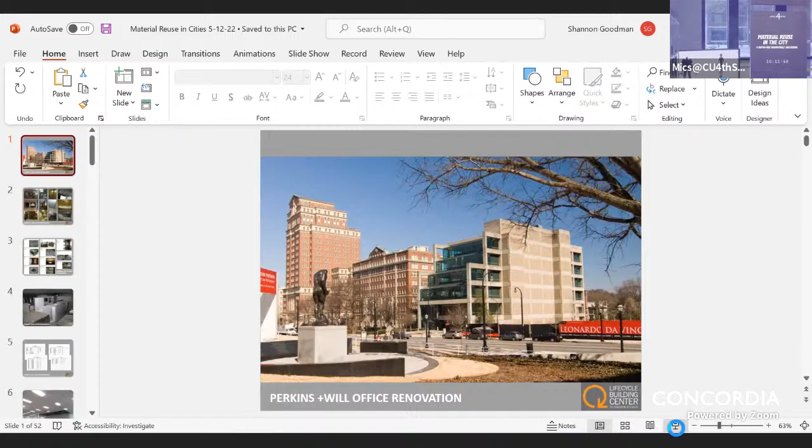Okay, so I wanted to just share a quick story. My background, or my path to reuse, started in architecture. And I wanted to just highlight my journey to where I am today, and then I'll talk a little bit more about what we're doing now.

So basically, this is a shot of where I used to work, a firm called Perkins & Will here in Atlanta. And this large concrete structure that you see was a building that was transformed by this company. I was involved in trying to figure out how we could reuse as many materials as possible in this building. It was a 50,000 square foot space.

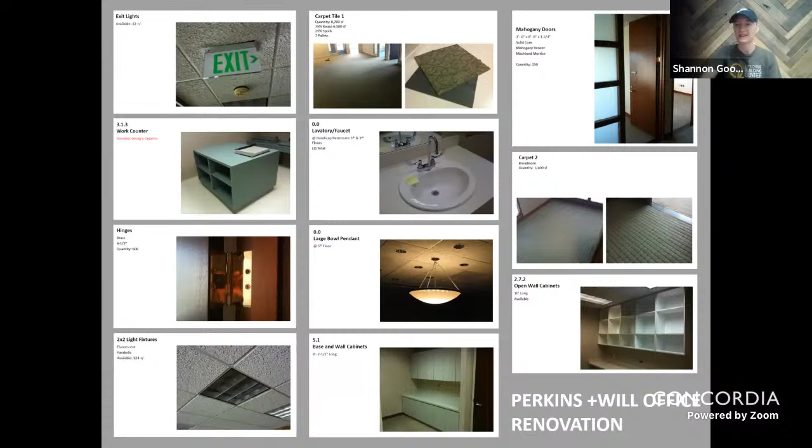And so lots of talking about data, Faisal, lots of tracking of information, and then just getting that information out to the community. So I would definitely like to talk with you more and learn more about what you're doing, because this is key. Being able to increase accessibility to this information is going to help scale up reuse. There's a physical aspect. This was actually before Lifecycle Building Center existed.

So we had an underground parking deck that we stored all the materials in while we were finding homes for them, and lots of data tracking on each of the organizations we donated to.

Just a couple of examples: we had schools, this is a church we gave ceiling tile to, and we had another nonprofit called Southface Institute, a great sustainability organization we were able to give cabinets and other materials to.

You can see some metrics we tracked in terms of the pounds of material and the value of those materials. Beautiful workstations came out of the space, carpet tile went to Habitat for Humanity, almost over $70,000 worth of carpet tile, and lots and lots of cabinets we were able to donate.

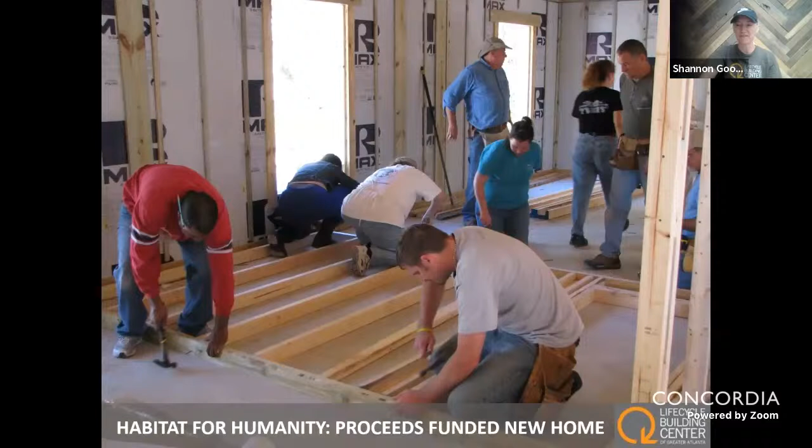But what's really awesome is what these nonprofits do with these materials, how it enables them to enact their mission and do more good work in the community. Habitat was able to have the proceeds from all these material sales through their ReStores fund the construction of a new home. This is a summary of some of the projects, all the different nonprofits that we donated to, and that's what led to my journey with LBC.

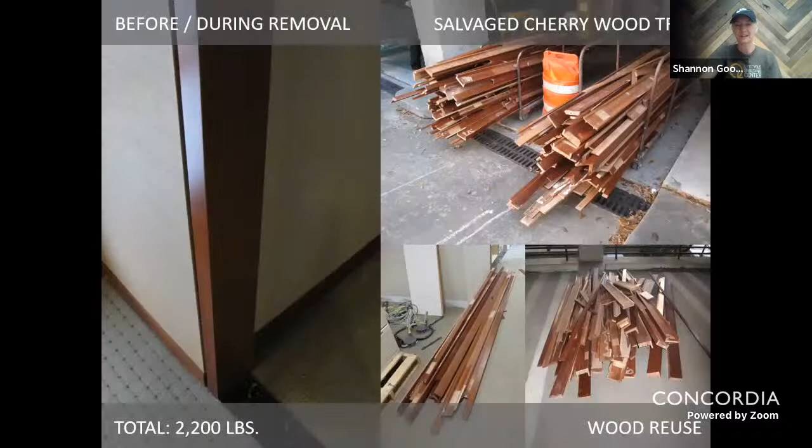I have this one final little story I've got to share though. We worked with our demolition contractor and salvaged this beautiful solid cherry wood trim, and the organization I worked with, Perkins & Will, transformed that into their conference room tables. So I never stop being inspired by what reuse can do in terms of community impact, but also how beautiful it can be. I'll share some stories, this is a little sneak peek for later in terms of our facility down here in Atlanta.

That's inspiring, Chanel—Shannon, rather. Sorry, we have a Chanel here. Chanelise. It's amazing what you can do from upcycling. I think a lot of people have a certain perception of it, and it's just incredible, the possibilities.

I'll hand it over to Isabel to tell us a bit about her work.

Sure. Hi, I'm very happy to join you guys from the other side of the pond. It's really exciting to see so many interesting things going down the same path that I'm working with. So I'm an industrial designer.

When I did my studies in Chile originally, I was a little bit like Faisal, very enthusiastic about sustainability. We actually tried to start a reuse market with secondary materials at the school where I was doing it, of course, with no budget and just enthusiasm. So it didn't get far, but that's kind of marked my way forward.

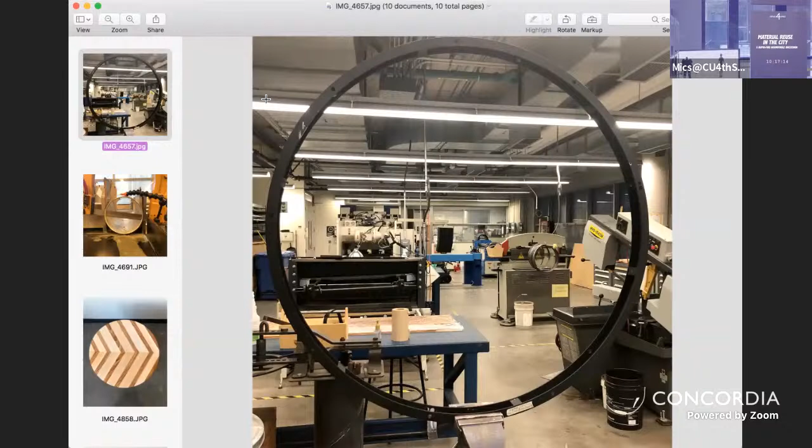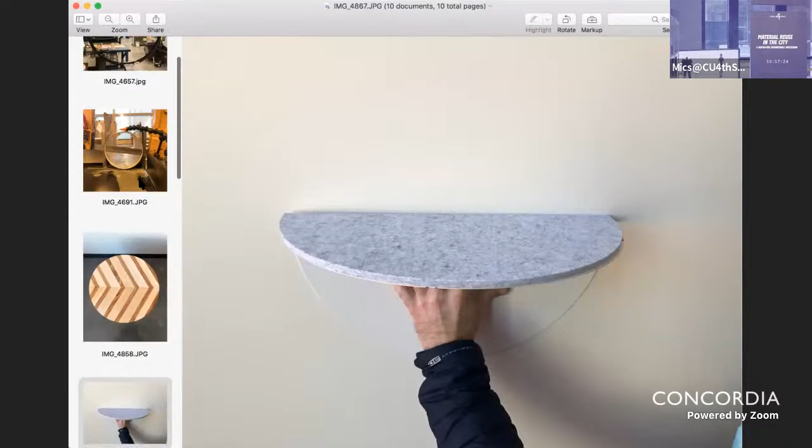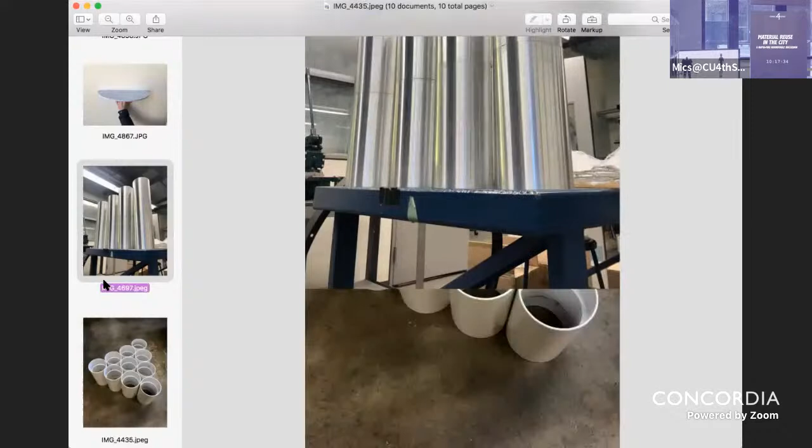So just a few images of some of my work in the workshops here, where I've been collaborating with a local manufacturer of lighting components and making some of these projects. These are the legs of a table project made from cylinders of a lighting fixture and plasma operations. So sometimes more on the craft end, and sometimes you can see there's more of an industrial side to it.

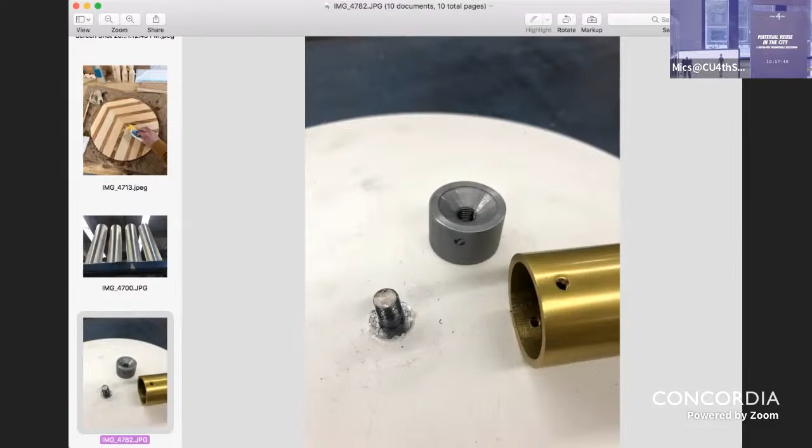For those that have had the chance, there's an exhibition—it's the last day, unfortunately, here at the 4th Space. So just to get an idea of what you can do again with upcycling and reuse.

So I wanted to jump into this topic and really ask our panelists what they see as the role of reuse in the circular economy, and the relative attention that it's been getting—reuse, repurposing, upcycling—these days.

It seems to me, I did a little search, and if you look globally, the term upcycling has been trending steadily upwards in terms of Google search terms since about 2008, 2009. That's very inspiring to see there's growing buzz, but I want to get your sense about this. I'm going to go back to you, Faisal.

Do you have a take on this? Yeah, I automatically think of reuse when I think of the circular economy. I don't know about other people, but obviously circular economy is a fairly comprehensive term that involves keeping flows as local as possible and minimizing environmental impacts. You can think in terms of energy, but I think of materials right away. I just think of the immense amount of energy that goes into materials.

I think there's more and more conversations happening about that whole hidden world, right? A lot of times when we talk about climate and energy-related emissions, we think of fuel for vehicles and buildings, but we're not always talking about the materials we consume and what a huge proportion research is showing it comprises in terms of greenhouse gas emissions. If we don't start figuring that out at the same time as we're talking about this other stuff, we might be in big trouble.

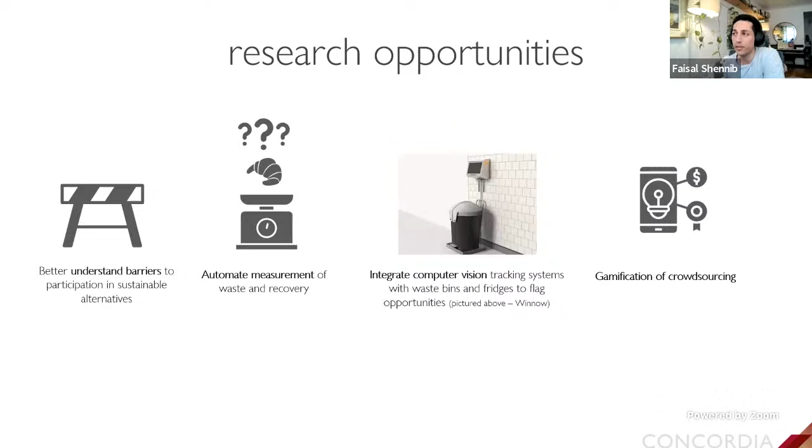And there's a lot of research opportunities. So that's kind of why I looked to become a researcher, because I really want to quantify, like Shannon was talking about, these opportunities to see if we can make the case to scale. And try to integrate some best practices from marketing as well, which I think is really interesting. I realize there's this whole world that product developers use when they're creating new products to market more effectively. We should be using these kinds of techniques for the secondhand world as well, right? We shouldn't leave all those goodies to these companies who are selling new things.

So I think there's catching up to do. And that's the same idea of the inspiration for data-driven approaches, right? Like when we think of Amazon, and I'll talk a little bit about that, we think of recommender systems. And so that's one project I'm going to talk about. But overall, here's the vision of what I would like to try to create at Concordia. I think this is what's going to happen in the future.

So this is a super kind of utopian, futuristic way of seeing material flows, but basically where we understand what's happening with materials in as many places as we can, all of these kinds of contexts, in order to be able to maximize their potential. So it's not just when you're throwing things away in a smart bin, it's not just at the reuse center, it's where things are going, it's in the dumpster, right?

Like, dumpster diving happens, but that's because there's valuable things in there, right? So we should have a place for things to pause before they go in the dumpster, for people to be able to get that stuff before they have to put themselves in harm's way, potentially, to get that stuff as well. Anyway, so even with food, right?

I think the surplus food market could have some of this technology applied. So I'm going to be working with this company, Evo Eco, to see if we can embed cameras that will detect what people are throwing away as effectively as possible. It's a big challenge because there's a lot of diversity, even in the consumer packaging market of materials.

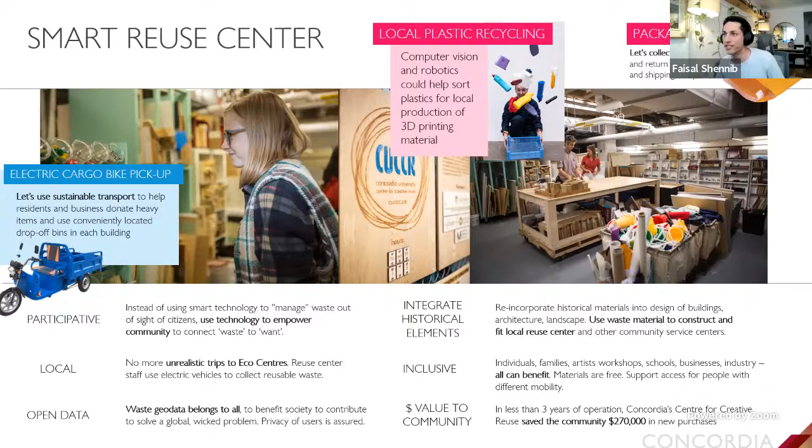But let's say, as a thought experiment, we have a lot of data on what kinds of people are throwing things away, and of course you have to be careful about personal data and anonymizing data. That's going to be a challenge as well. But then maybe you start to uncover patterns of what types of people are using what kinds of materials. So if you have membership data, are they a student? What kind of student are they for Concordia? The relevant information, not the stuff that creates biases, but things that help create a useful association with materials and recommendations.

And then maybe they get a push recommendation saying, hey, there's a canvas available here. You're an art student, you should come by. So that's the thesis, that's what we're going to try to do at Concordia. It's just a thought experiment so far, but we're going to try it out.

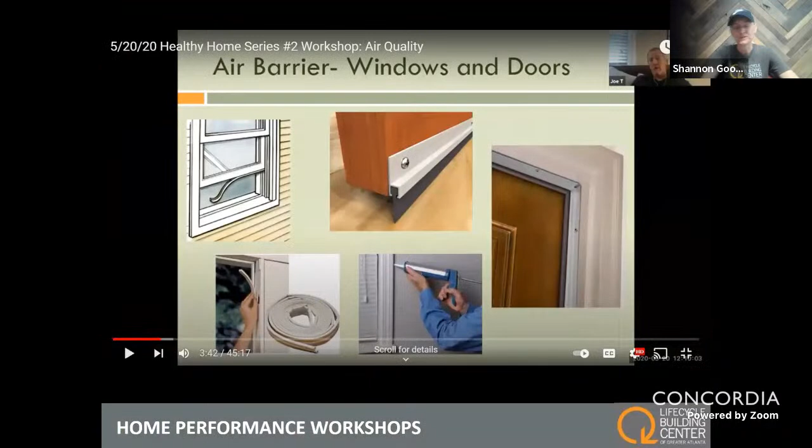That's the key. I think, Patrick, you mentioned the workshops. We get super excited about taking these materials and helping people build skills, and those skills for making things can be converted into projects in their own home. We also do some classes around energy efficiency and home performance, and we've started converting some of that online as well.

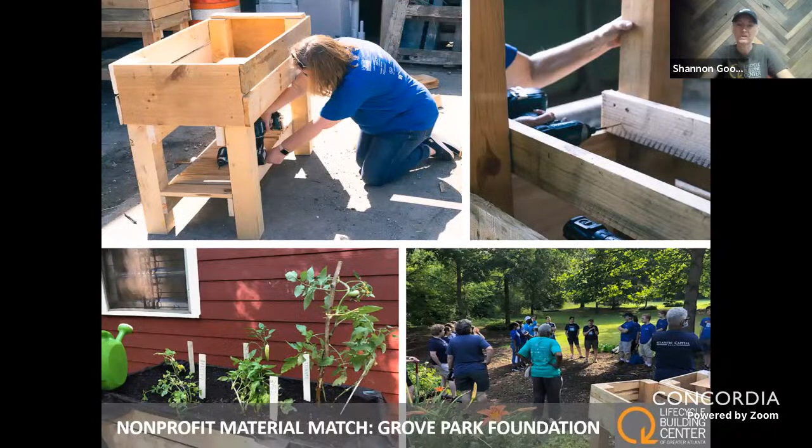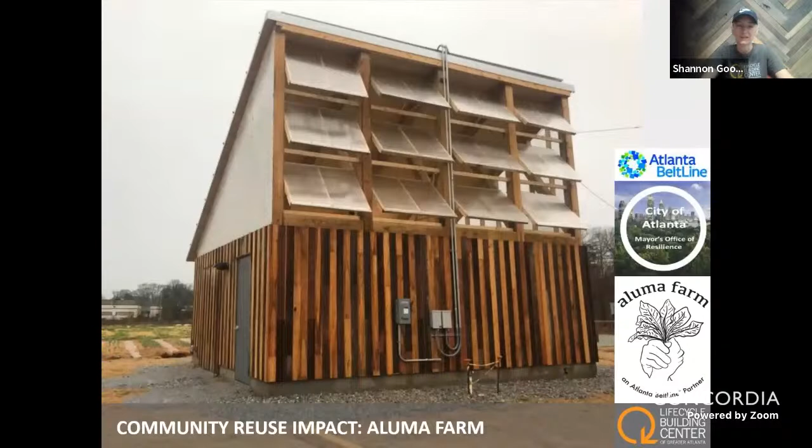Another urban farm project - we were able to deconstruct all of this siding material from a couple of historic homes in Atlanta. We were able to give them 2x4s to build all their seedling trays, and fixtures to rinse off produce.

I like to tell people a lot that folks that engage with LBC, if they're looking for materials, it's not necessarily because they're trying to be green - it's because they're trying to save money. And that's fine. They don't even have to believe in climate change; they're still supporting environmental sustainability by engaging.

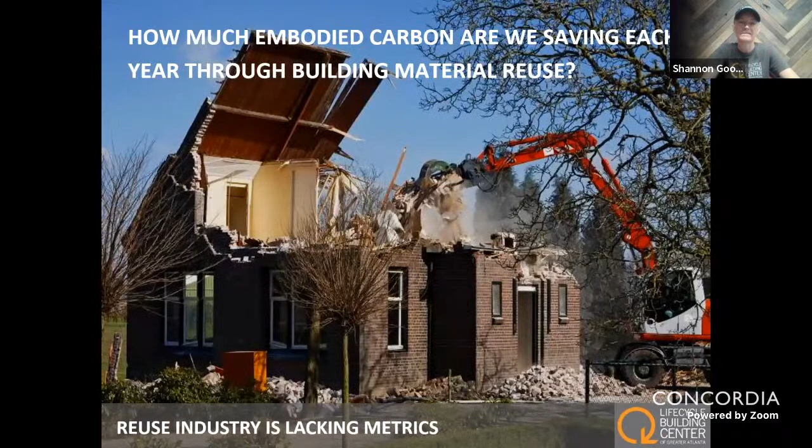Economic impact is huge - how many jobs are we creating? How much money are we saving people in the community across the US? How much embodied carbon is our industry saving across the country? We're not tracking the value, the impact value, of all these materials we're wasting. When you look at carbon, it's not the easiest thing to figure out - there's all these nuances of how you decide how much carbon depending on each specific item.

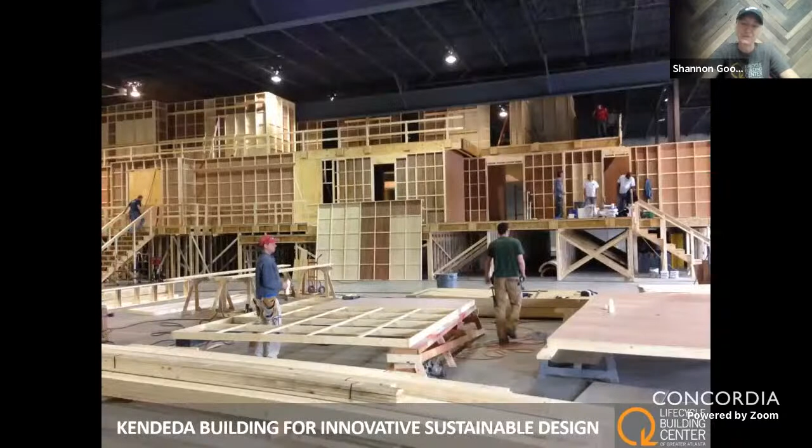Last but not least, I wanted to share this really cool story. We have an amazing example of reuse in Atlanta called the Kendeda Building for Innovative Sustainable Design on Georgia Tech's campus. I'll mention again those floor joists you saw in the roof of that greenhouse - this is an example of where those came from. If you see the structure of this TV film set, we were able to recover a lot of different materials for the Kendeda project, but one of the most exciting ones were the 2x4s that were built for the platform under the TV set.

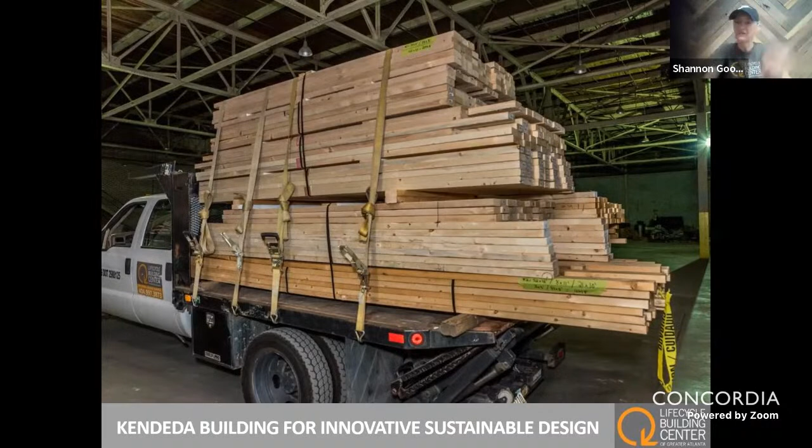Those were the workforce development Georgia Works placements, working with the general contractor, converting those reclaimed 2x4s into beautiful nail laminated timber decking panels in the Kendeda project. Amazing project, would love to tell you more.

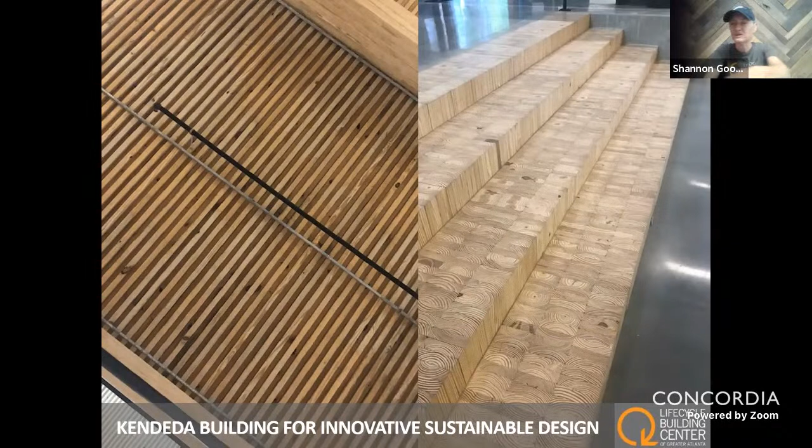Another couple of examples: even the leftover 2x4 material was turned into the monumental stairs and space. Lots of reclaimed wood from buildings on Tech's campus, including slate tile that came from the roof of a building at Tech from the late 1800s. So lots of cool stories.

Thanks for letting me share that. Super inspiring, Shannon. So many questions and exclamations that I'd like to talk about, but I'll hand it over...

...to Isabel for a quick project she wants to share, and then we'll open the floor to questions and comments. I'm super happy to see all this, so much information. We definitely have to do another call, just us, to nerd out and share tips and tricks. If people have resources, Shannon, you mentioned organizations and links, you could add those to the chat so people can click and bookmark them while we're talking. Go ahead, Isabel. I put a couple of links in the chat already, and you're seeing my screen, right? Yep, super.

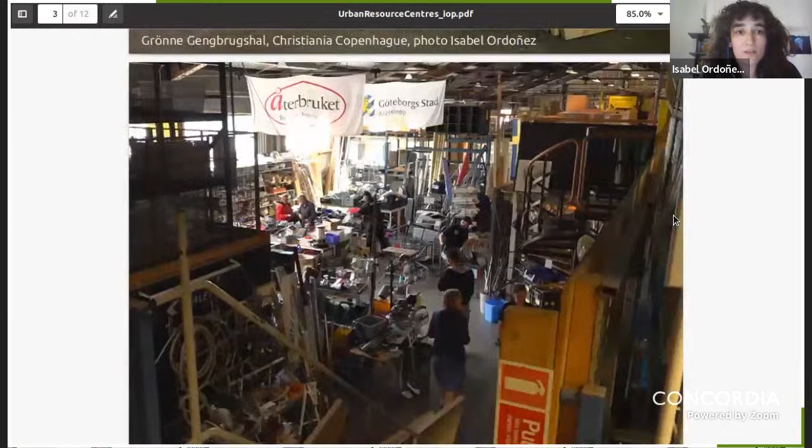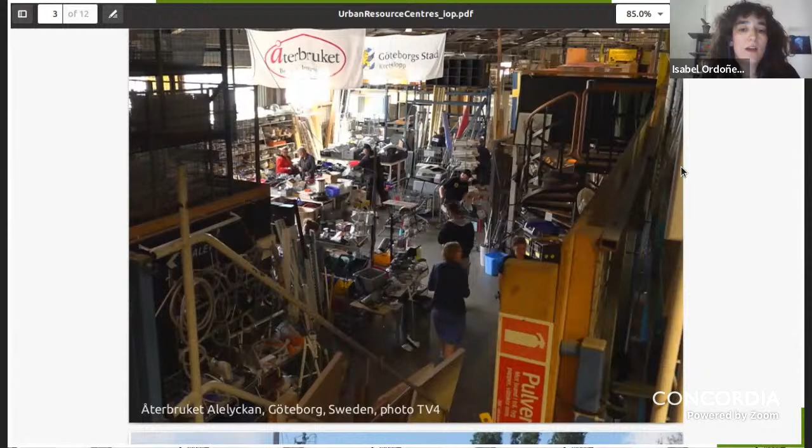This one is Återbruket Alelyckan in Gothenburg, Sweden. It's a recycling center or reuse center at the recycling station. When you drive to the recycling station to throw things out, they ask if there's anything that could be reused. If you say yes, they divert stuff for construction and building, but they also have a secondhand shop for clothing and furniture, and a workshop for repairing different elements.

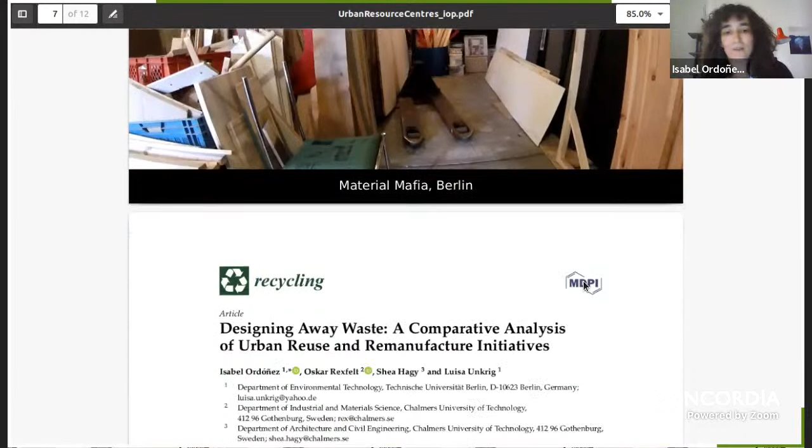And I worked, or I still work closely with Material Mafia in Berlin. We did a project called the CURE project, or Centers for Urban Remanufacturing. And this is one of the results of that.

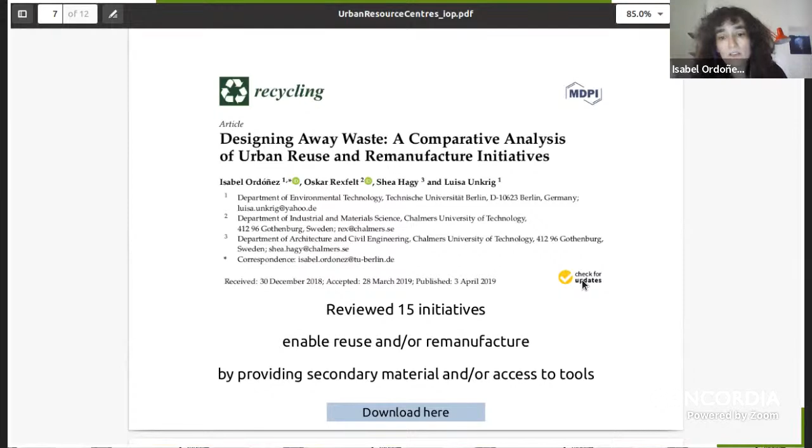It's an open source article, also downloadable, where we reviewed 15 of these initiatives that enable reuse and or remanufacturing by providing secondary materials and or access to tools. Very similar to what Shannon and Fasal have been saying, we say that these things have secondary materials, but there's also a need to work with them.

So we also need tools and open workshops. But there's a lot about capacity building and workforce development, but also how do we make a business out of this, and how do we make new products that are sellable and upscalable. That's kind of the long-term vision we've thought about.

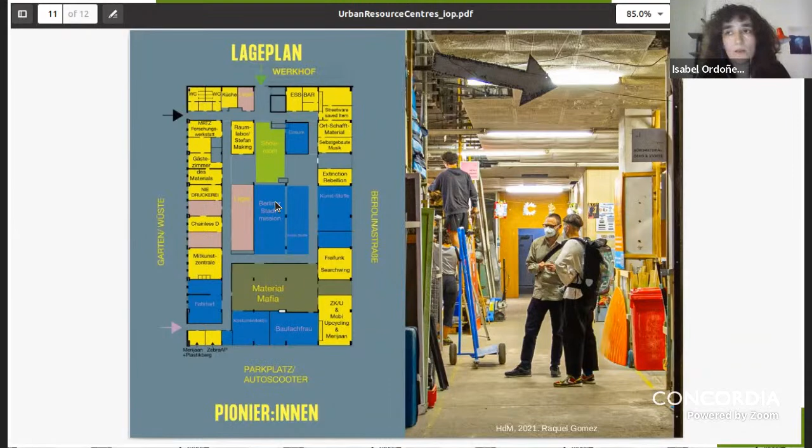And then they have different organizations that actually use this, either for reuse, repair cafes and so on. And there's also workshops for textiles and wood, etc.

I'll stop there, and I'm sorry if it's gone too long.